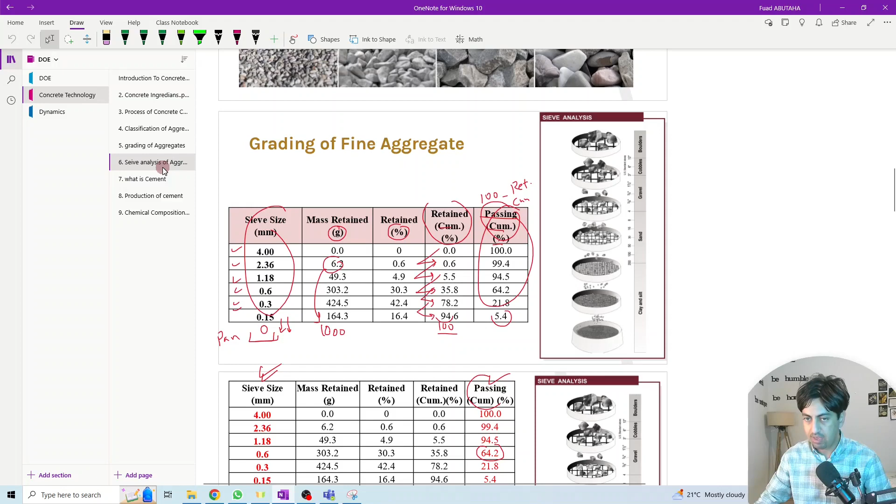We have already started with the aggregate in the previous section. We have studied the significance of aggregates, the volume of the aggregates, and the properties of the aggregates. And we have seen that aggregate occupies roughly 75% of the total volume of the concrete. The high percentage of aggregate content in the concrete, roughly 75%, significantly influences the concrete properties in general. So a small change in the properties of the aggregate will make a significant effect on the general concrete properties.

So today we'll start looking at cement, one of the main ingredients of concrete, and we will discuss what is the purpose of cement and why we need to add cement. The word cement can be applied to any material that binds or unites, essentially like glue. So it's not only for concrete. We can call any material cement if it has the gluing or binding properties.

So cement is used as a binding material in mortar, concrete, etc. The purpose of the cement is the binding properties, and that's why we call it a binder material. The binder material we are using in concrete is cement. So what is the purpose of the cement? The function of the cement is binding the aggregate particles together.

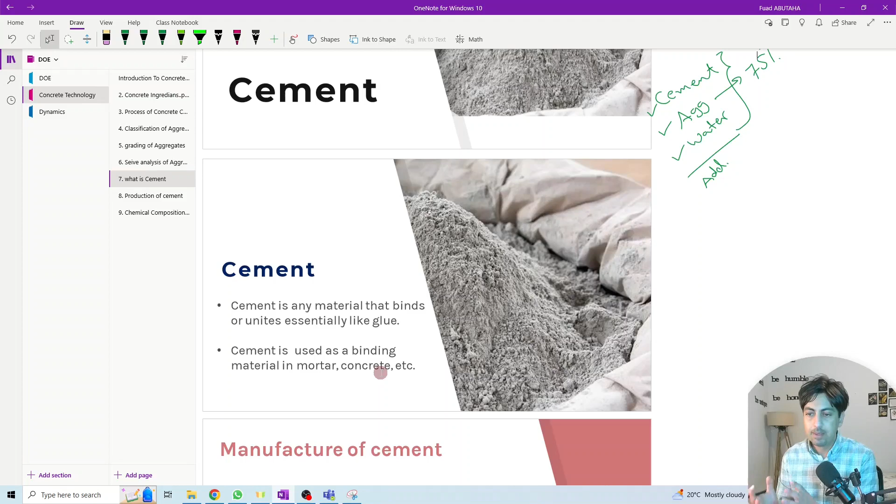So why do we use cement? Because cement acts as a glue that binds or unites all the aggregate particles together. They bind together, and at the end of the day, we come up with a big stone. We call it concrete. So this is the function or the purpose of using cement.

So cement is a hydraulic binder and is defined as a finely ground inorganic material that, when mixed with water, forms a paste that sets and hardens by the process of hydration. And this is actually what cement does. Cement, when it gets in contact with water, chemically reacts and gives us calcium silicate hydrate plus calcium hydroxide. So this is the chemical reaction. We call it the hydration reaction.

Cement, when it gets in contact with water, produces calcium silicate hydrate as an outcome of the reaction. And the calcium silicate hydrate is the source of the strength. What makes the concrete harden over time? The presence of cement, because cement is the binder material responsible for hardening of the concrete over time. So what makes the cement harden over time? The process of hydration, or the hydration reaction.

So what is the hydration reaction? The hydration reaction is the reaction between the cement and the water that produces calcium silicate hydrate. And calcium silicate hydrate is the outcome of this reaction and acts like a glue that glues all the aggregate particles together, and at the end of the day we come up with a big rock, we call it concrete.

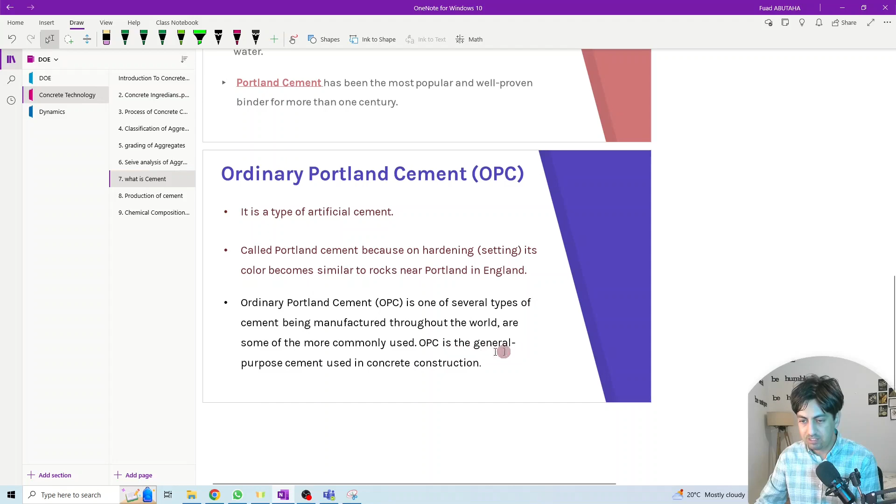We call this type of cement Portland cement because of the similarity in the color of the concrete made with it. So ordinary Portland cement is one of several types. As we mentioned, we have many types of cement for different applications, but for most uses and normal applications, we use Portland cement concrete. Being manufactured throughout the world, it is one of the more commonly used types of cement. OPC, ordinary Portland cement, is the general purpose cement used in concrete construction.

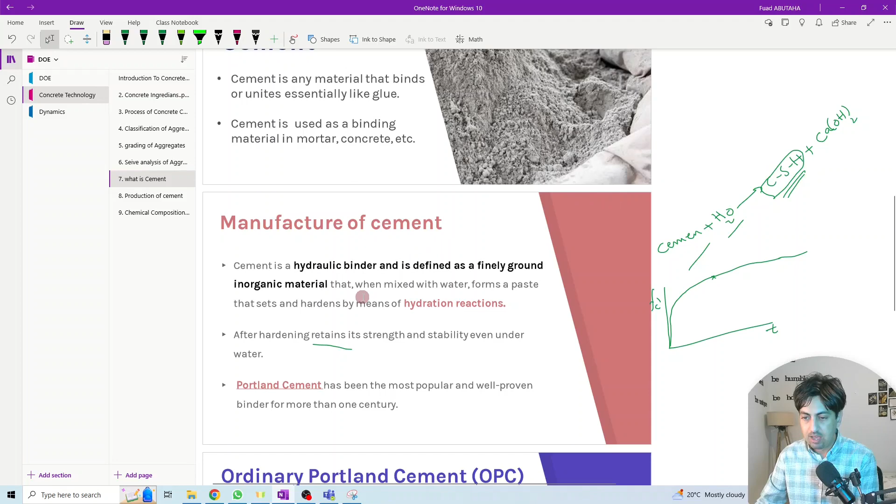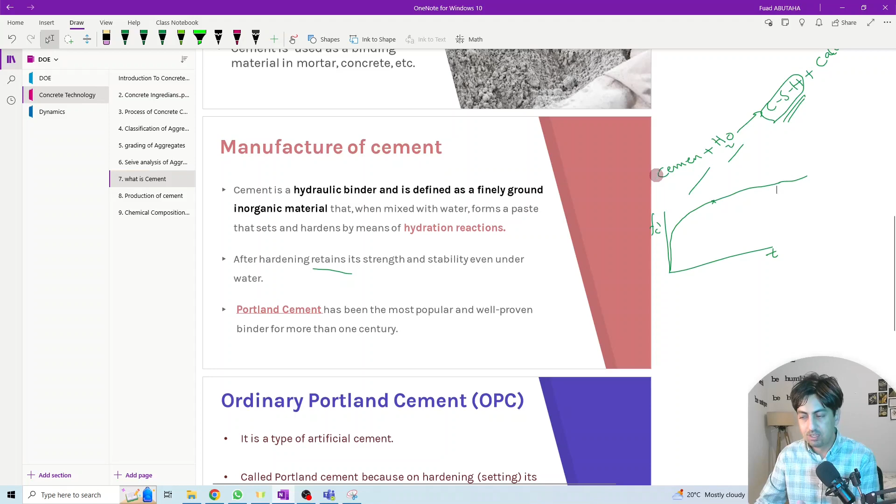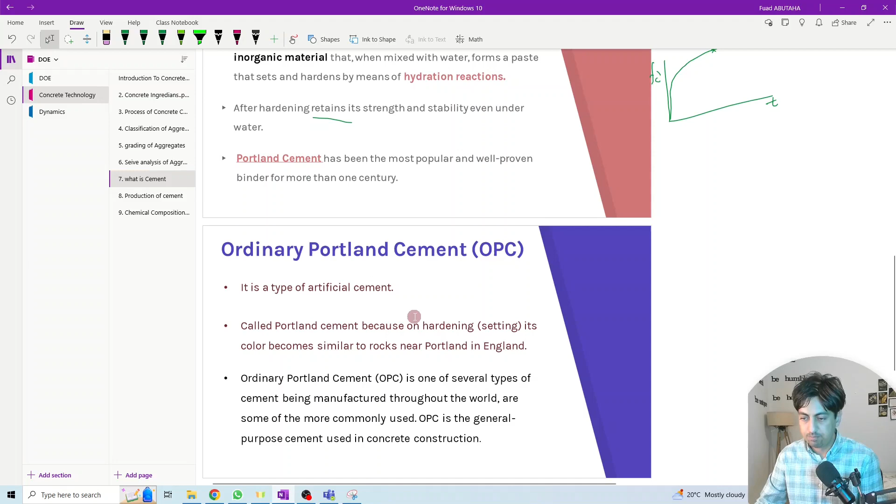So this is an introduction about what cement is and its function. What makes the concrete harden over time is the presence of cement, which is responsible for the hydration reaction that produces calcium silicate hydrate. Calcium silicate hydrate is responsible for the strength of the concrete; it is the source of the strength of concrete, and it results from the hydration reaction. What is the hydration reaction? Cement and water chemically react and produce it. And what is Portland cement? So this is an introductory session on cement. I will continue with the production and manufacturing stages of cement in the following session.